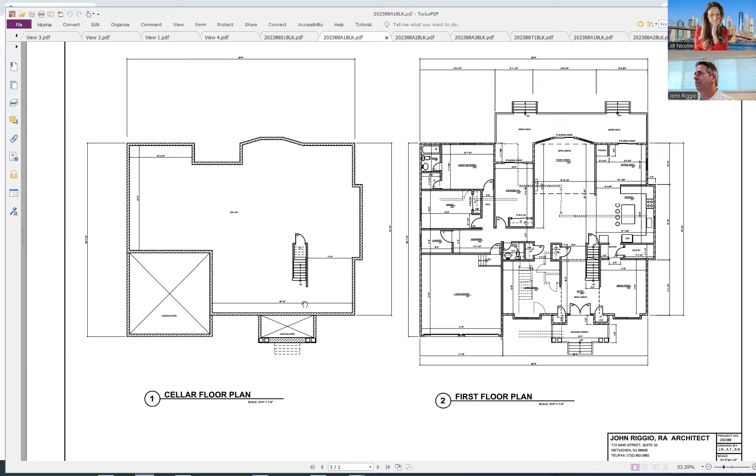And this is also just showing some proposed plans. Then this is also the proposed plans of the design. Now this was design number 6. So I sat down at least 6 times with the owner and went through the design, developing it, improving the design, getting all the different requirements that they want.

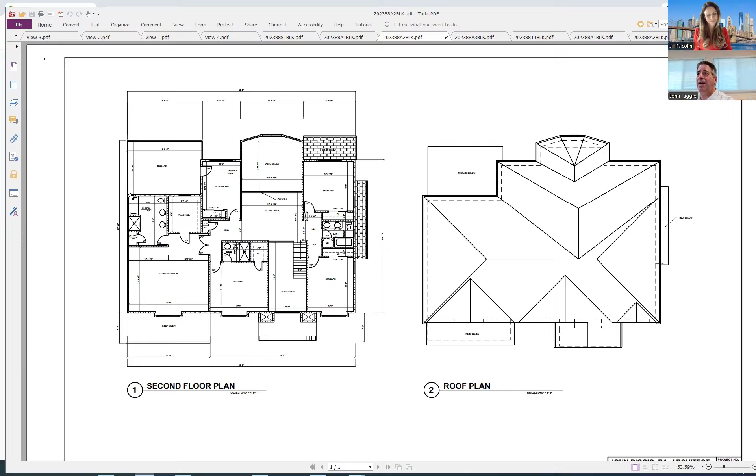And there's all kinds of interesting things on this house, with a custom stair that has a nice curve on it. Then we have the double height spaces. This also developed where I put in this really nice covered terrace in the back of the house, and I'll show you that today also.

And this is the design drawing. So the design drawings are showing all those different things, the nice windows in the back of the house, the new front entrance. So from there, also, there are some renderings.

So let me go to some renderings of the house. Let me see, I have a couple different renderings here. Let me make sure I have the correct ones.

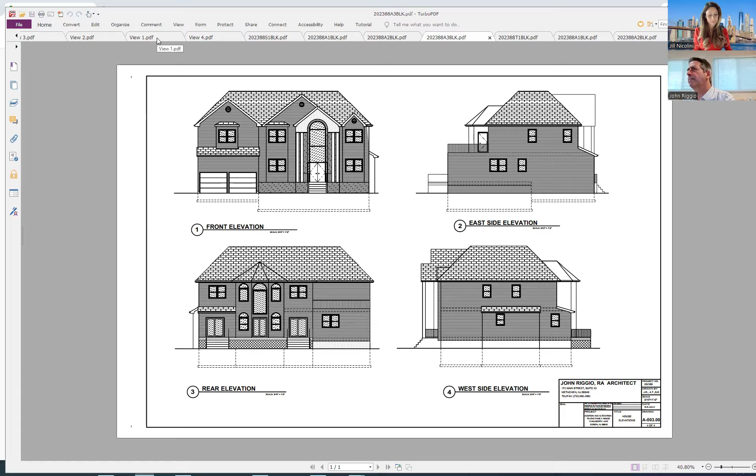Okay, so this is the rendering of the house here. And this is just going around the rendering, showing the house here. This goes around with 4 looks at the house, going around here.

And I think this rendering is very good. It really shows the columns here, the covered roof with the terrace. It shows this proposed deck with the windows. And just going back through, it shows the front entrance with the thin stone veneer. The rest has a siding with the new

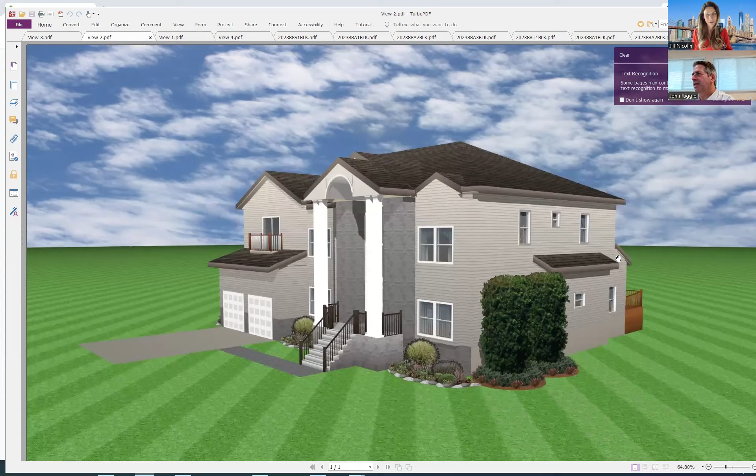double doors entrance. Beautiful. Oh my goodness, how you could do all this and even the landscape. Oh my goodness, and those columns in the front. Gorgeous.

This is still a 3D rendering. I just improved the software, and I'll show you a sample, after I go through this house, of some new ones that are called photorealistic. So from there, we had the final model of the house, we had the final design of the house.

Now there are no other changes. The owner selects his contractor, gets his permit, and starts the construction. From there, I can show you the construction drawings.

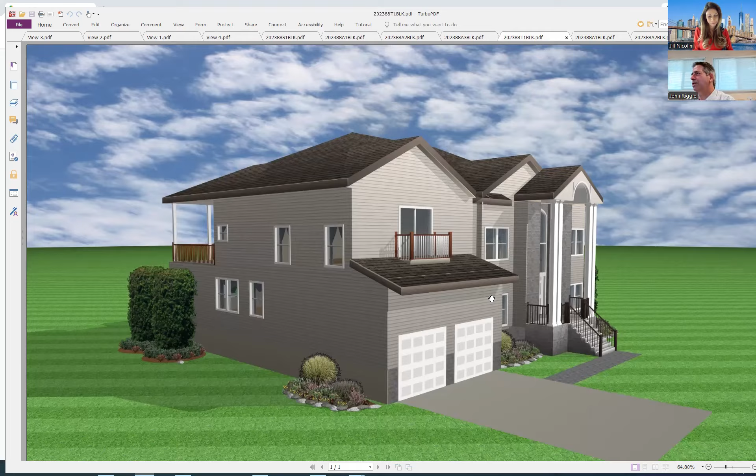The house is really going to get completely removed. Only two walls are existing, and in the end, the whole house was considered a new structure. He didn't have to get those extra permits for the water, sewer, and things like that, so he still saved money, but in the end they considered this a new house. So it worked really good.

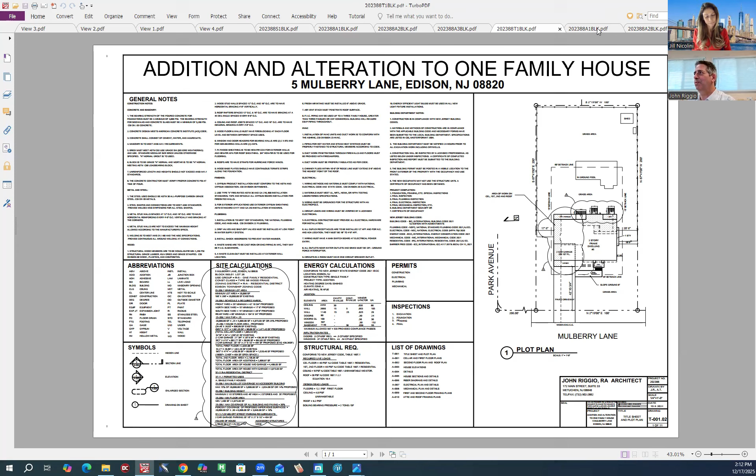This is now the plan. The shading on the tops of these walls shows where the cellar height is being increased, while the rest of these walls are all brand new. So the cellar has all new heating and cooling throughout the whole house, all new structure.

To the right side here is the first floor plan. Since this plan shows the latest revision, it now includes the curved stair and all the different things that were slightly modified during construction of the house.

This here shows the second floor plan. Let me just go through the first floor plan — let me zoom in.

This floor plan shows the entrance, the doorbell, and you enter into the door. You go into the lobby, then enter here — formal dining on the right side, formal living on the left side. You walk in, then enter where the kitchen is. From the kitchen to the dining room, there's a little butler counter.

There's a pantry room. In front of the kitchen is the breakfast, everyday eating area, with a small prayer area and sliding glass doors. There's a family room here, and to the left side from the living room, you walk through to a toilet room.

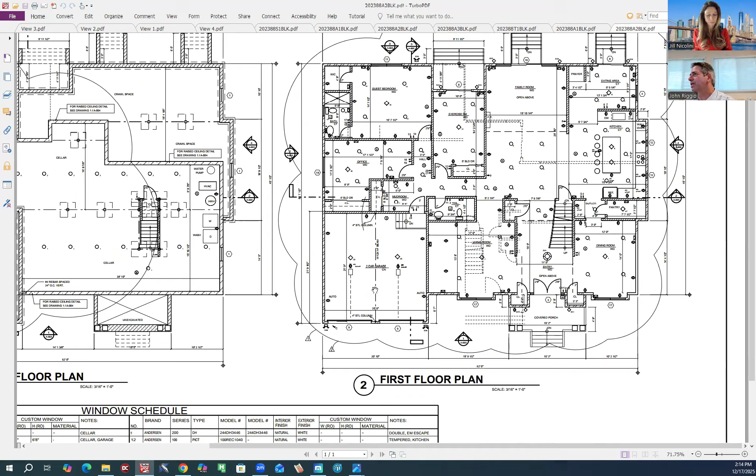Let's zoom out and go to the next sheet. This shows the second floor and the roof, which is put together very simply in the end — it's really large but simple to construct. This is the second floor plan.

As you go up the curved stair, there's a sitting area in the middle, two double-height spaces, two bedrooms with a bath in the middle, and one bedroom with its own bath. Then there's a laundry washroom, a study room, and the master bedroom with a terrace in front, a little balcony, and a bath with a freestanding tub, a window, and a walk-in closet.

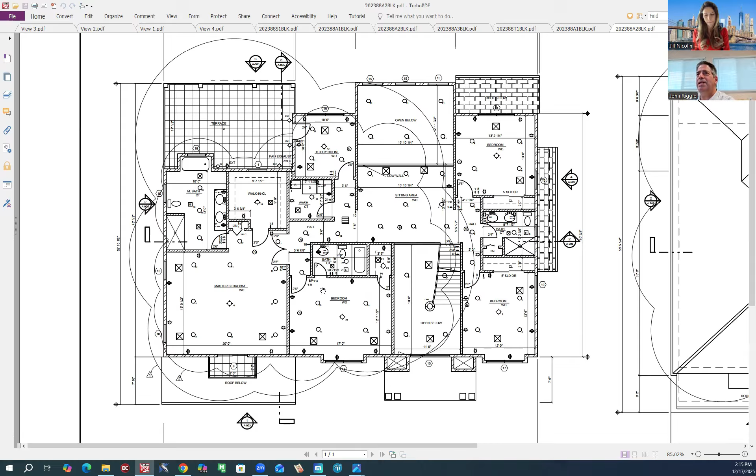As you go through the study room, you can walk out onto a covered terrace, which came out really good and works well. It isn't included in the floor area, which is a bonus, but you still get a large area you can use to sit out in warm weather.

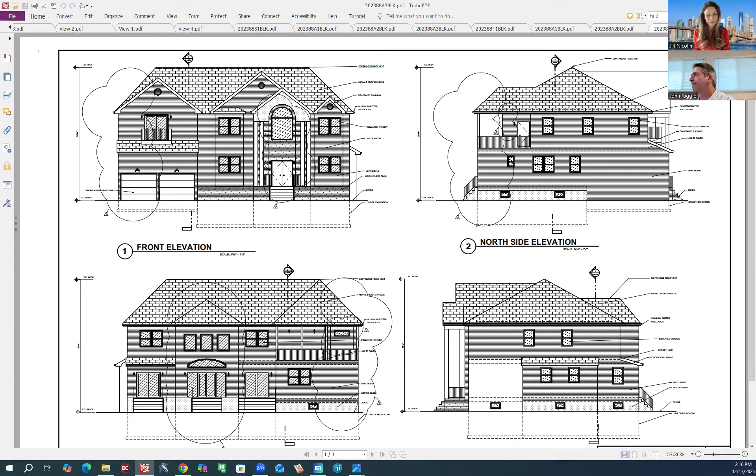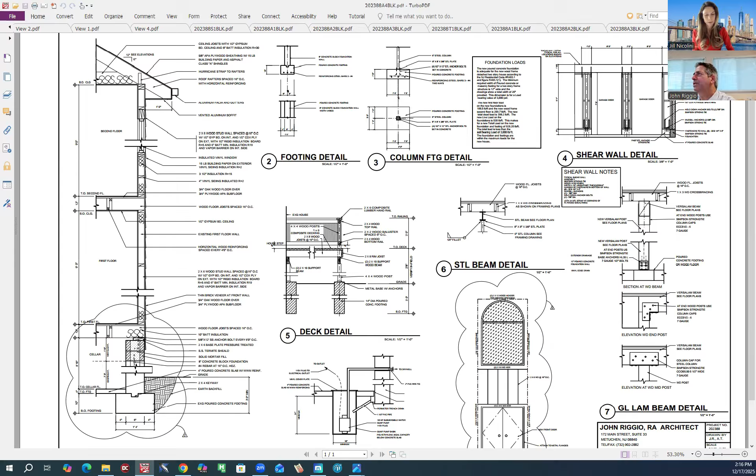This one here is some details — all kinds of details adding to the foundation, front, the two-piece window. They stayed with the two-piece on this one. And then this here is just some basic sections.

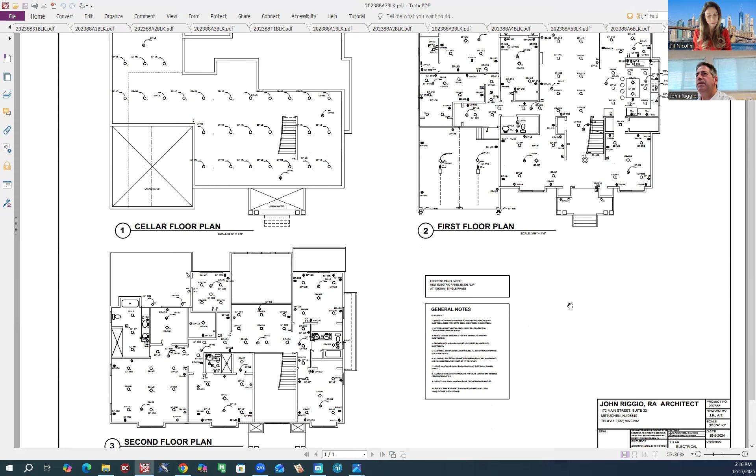On this set, I did the full MEP, giving them water piping diagrams along with the plumbing and gas lines, and the electrical diagrams too. This is the mechanical air.

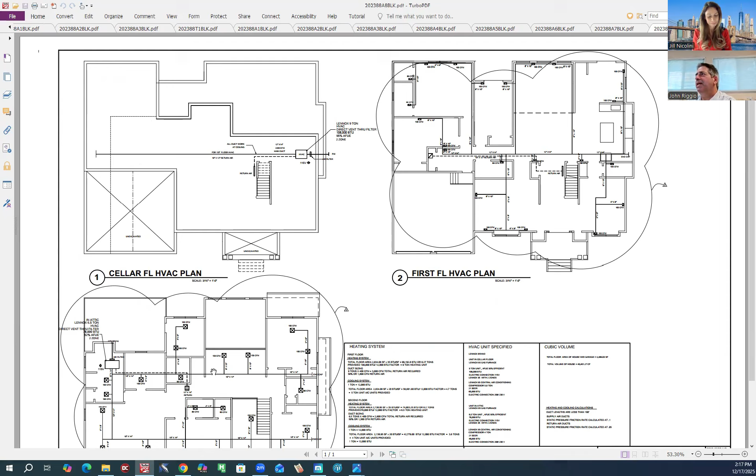Mechanical air these days always has two units, one in the attic and one in the cellar. This makes the overall system work easier, more efficient, and it's also less expensive to install this way. So this is the going trend.

And then from there, I have some other pictures. Let me see where the things are here.

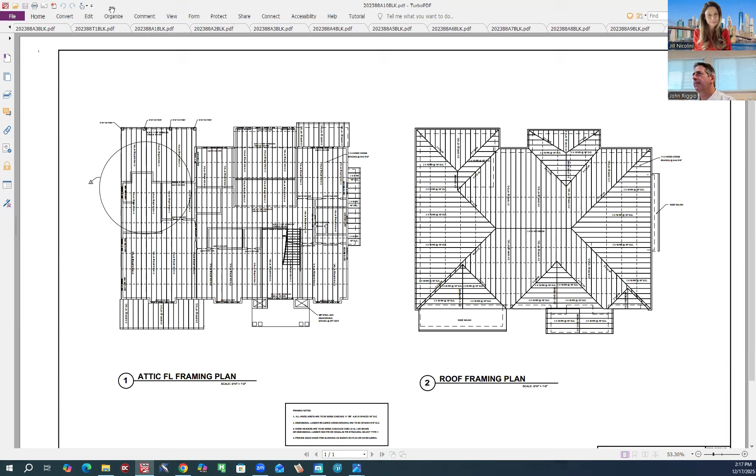Okay, let me stop here and head over to show you some other photographs.

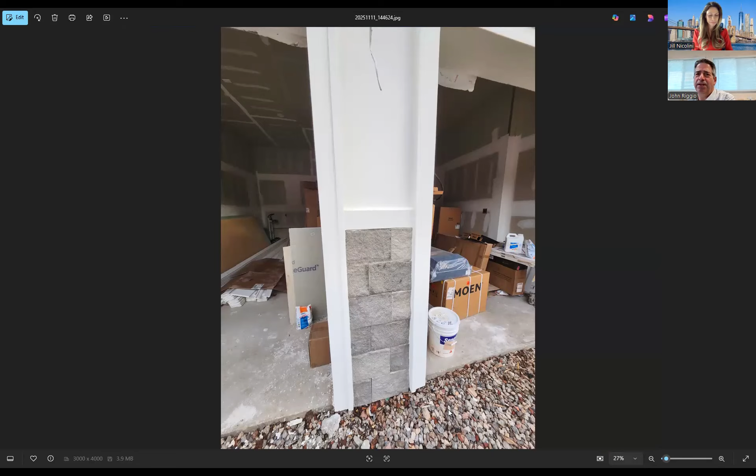That's this here, and you can see all the different stones before they finish the driveway. You can see the driveway here - this is just getting finished.

This shows the main steel beam in the garage, and this shows the entrance. It came out very nice with some stone tops, the thin stone.

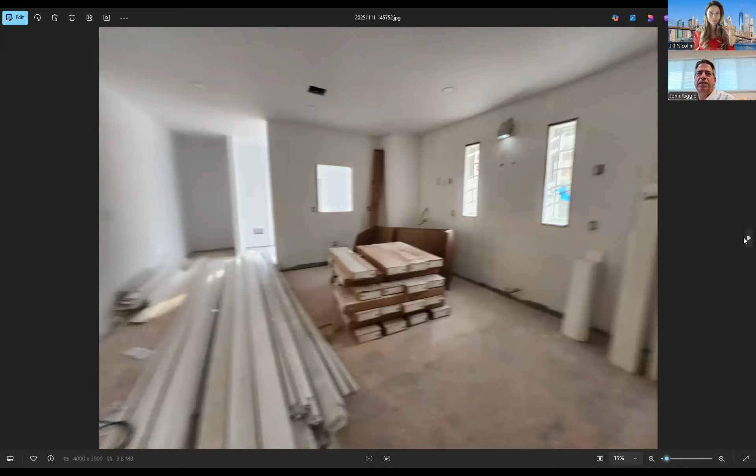And this is the pantry. This is cute, the size of the pantry room. This is the kitchen, and this is the breakfast area.

This is looking back towards the front of the house. They put in this nice glass pane door to go to the cellar, and this is looking between the two rooms, just showing up close of those four doors towards the backyard.

And then this is looking upstairs. I love that. So this is the very nice iron balusters with the handrail, and the two wood posts to hold the whole thing together.

It looks really good. This is the chandelier, and they really have a lot of nice new chandeliers these days because they're all LED lights. This here is showing that curved stair, and this is really good.

And this is just a sample of some of the ceramic tiles that go on the floor. They already completed some of them here with the shower. It has the shower seat, which is very popular these days too, and it shows the drain here on the base of the shower. And these are small little shelves they build in for all kinds of soaps and things like that.

This is just showing the house with the freestanding tub and the custom window towards the back of the house. This here is just showing in between the rooms. This is the detail of that same freestanding tub.

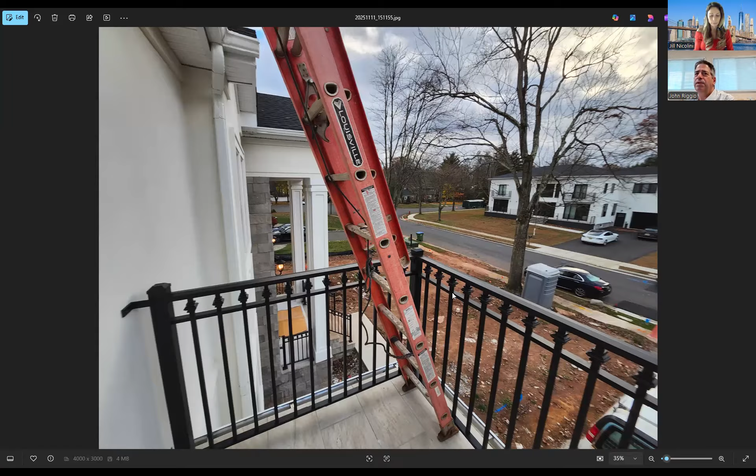No one has complained about it. This has a really nice metal railing, and it also has a rain gutter too, so the water drips off, goes past the drip edge and into that gutter, and it works really good.

And this is just showing the front of the house here, and this is a look of how that balcony looks with the light fixtures over the entrance.

And that's the owner and my assistant.

And this here is just going through some of the bedrooms, has a fan light in each room. And these are some of the, this is the sitting area.

As you go upstairs, you come to this landing, and to the left overlooks into the family room, and to the right is the entrance. And then you enter in here to the bathrooms.

And this is the terrace. So this is a terrace where you walk in here. It's covered, has the posts here, and it looks really good.

And this has the finished floor on now with the ceramic tile floor, and it has railing. So I think you can see this is really finished now. It's watertight. They had put an underlayment under there, and then this ceramic tile finishes it really good, with the light fixtures. And this is just showing from the second floor to the front entrance.

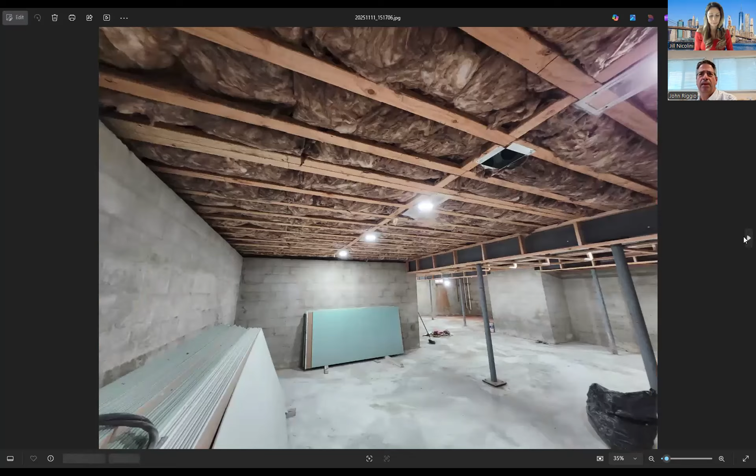And this is just the cellar. Now the cellar is really good. It has an all insulated ceiling. They could put fire rated sheetrock on there.

And then it has a really nice steel beam with some columns that I sized, and all new walls, with the exception of just two walls. And they raised the whole ceiling up, so it was really very solid. And this is some close-ups of the steel beams, seeing that they're bolted in there.

And this is just showing the basic cellar with the high efficiency unit. This is a really nice unit, has all the features on it. And then this here just shows the new stair going to the first floor, and all new electric, of course, too. So then that's there.

Let me just share on this now. I have, okay, so now I also have some other things, and I should have a walk around of the outside. Let me just see if I can find it. Okay, let's see, where is that? Oh, okay, all right. I don't see a walk around. Let me see if I can find, where is that walk around?

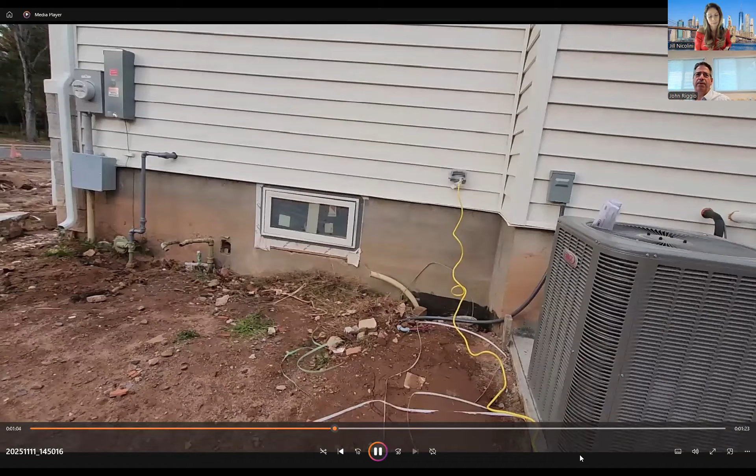This shows really a nice structure on the house with the front entrance, double columns. The thin stone really gave it a grand look to it, it matched very nice with the driveway.

All the different things - there's always changing materials going on. The different supplies and materials they offer, and there's always different changes with the construction because of that reason. That's just so beautiful.

Does that stuff have to be pressure washed a lot? Does it get mold on it? Is that stucco? What is it called - a Dryvit stucco exterior insulation finish system, and it is very durable. Lasts a long time.

It's sort of a new technology that came out in the 1980s, and they've made it very wearable. Doesn't seem to blow off the house in storms or anything like that. It is really good these days, and it gives a lot of insulation. A lot of people like it, they're still improving it.

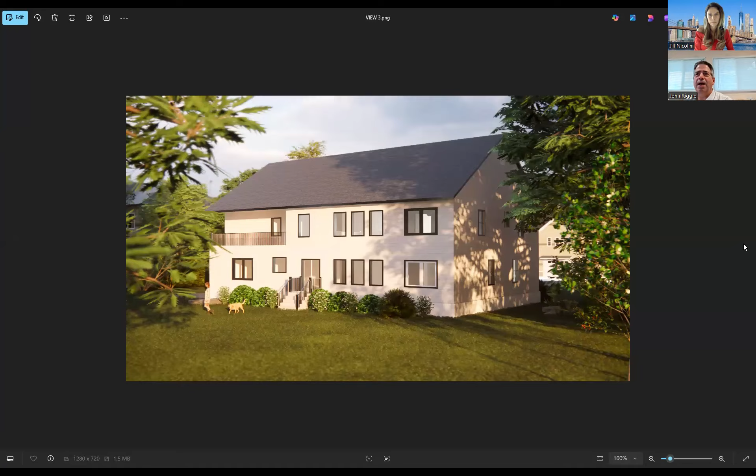This photorealistic rendering - my renderings are going to start to look more like this now. It's really good. This is really based off the same renderings I showed earlier, but it's a new technology, a new software that I now apply to that rendering, and it makes this really nice picture of the house. I think it's easier to visualize what's happening because you see the house and it looks a little bit more photorealistic, that's the word we're using for this.

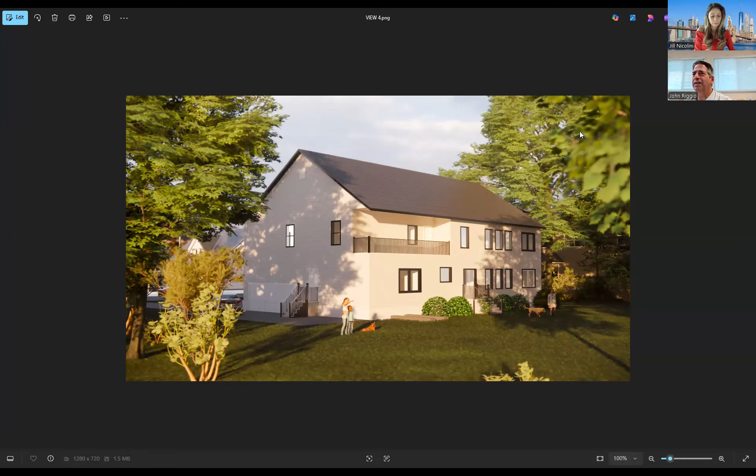This is showing another view of the back of the house. You can see the light here with the different things. It even shows some people in here, shows a pet dog, and it's really good. So this is the newer technology for the renderings.